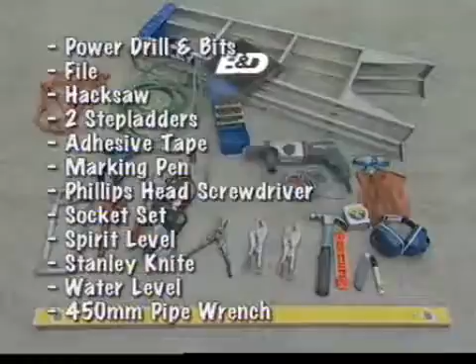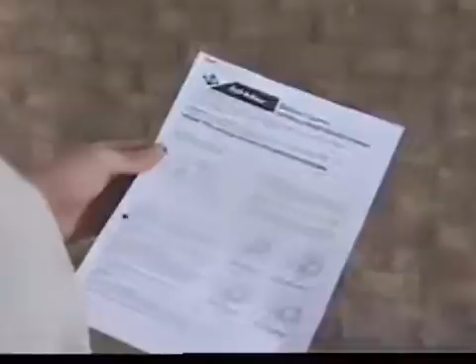B&D roller doors are designed to be mounted behind the opening. Therefore, you'll need to measure and check the opening width, opening height, side room and headroom. You'll also need to check that the opening is level and plumb and that it is structurally suitable.

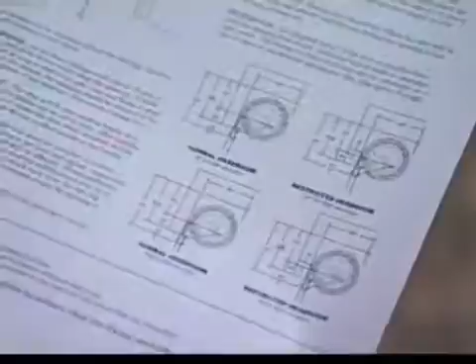The door will fit any opening height up to the marked door size. A door cannot be installed higher than its maximum size. However, it can be installed in a lower position, providing the door guides are cut to size. If the opening is too high, the door should be installed at the maximum door height position and the opening reduced.

As the door overlaps each side by 25mm or more, the door should be 50mm wider than the opening. A wider door can be fitted as long as additional side room and fixing is available. If the door is too narrow, the opening should be reduced by fitting jambs to the inside of the opening.

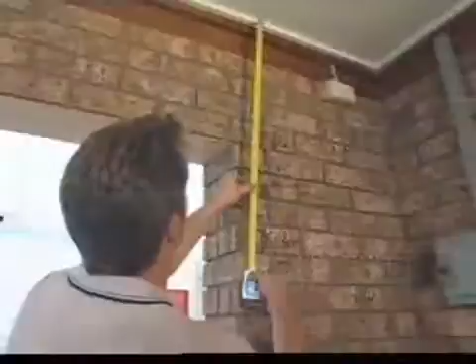The door is supported on brackets above the opening at each end and requires headroom for the door to roll up in. You should refer to your instructions for headroom requirements. Consequently, piers or doorposts must continue up past the top of the opening to provide fixing for the support brackets.

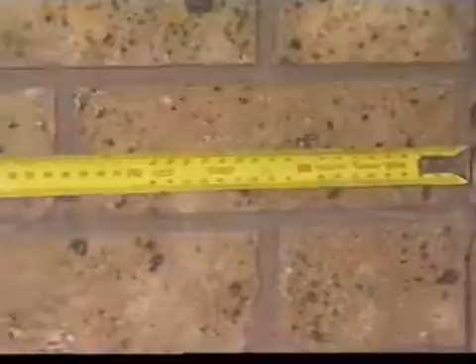A minimum of 75mm of side room is required behind the opening and should extend above the head to allow for bracket fixing. 100mm is desirable. Side room on one side of 115mm is required if a B&D Controll-A-Door garage door opener is to be fitted now or in the future.

The door must be installed in an absolutely level condition. If the opening is not level and square, appearances and/or side room requirements will be affected. Where jambs are out of plumb, extra side room or opening modifications may be required to allow the door guides to stand back from the opening edge.

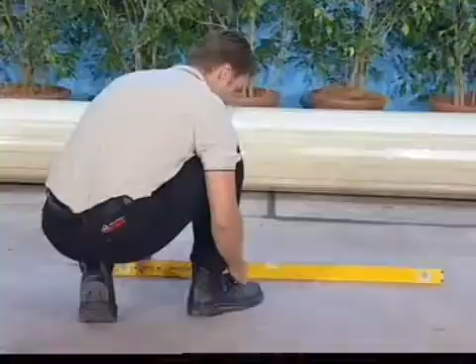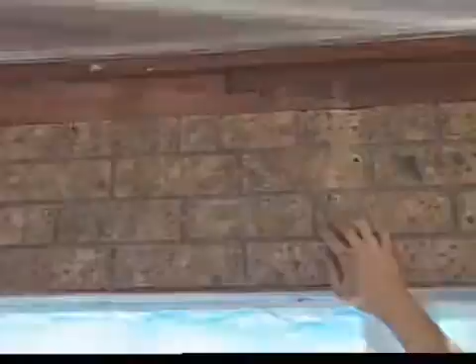The floor should be level or recessed across the opening to avoid gaps. If the floor is not level, contact B&D for taper panel options. Ensure the opening is strong enough to support the door. Ensure that the surface where the door will be fitted is flush and smooth and the area behind the opening is free from any protrusions.

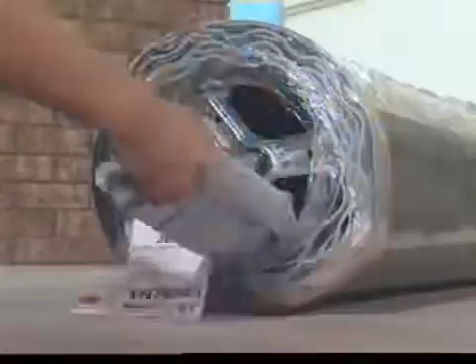Do not unwrap the door roll at this stage. Your B&D door will come delivered with identification tags and protective packaging. Remove the brackets, guides and bag of small parts from each end of the door. Make sure that you have been delivered all the correct parts.

You should have a rolled plastic-wrapped door, A-style brackets, left and right-handed, door guides, left and right-handed, steel locking bars and a small parts bag. You should check the contents of your small parts bag against the parts list in your installation manual.

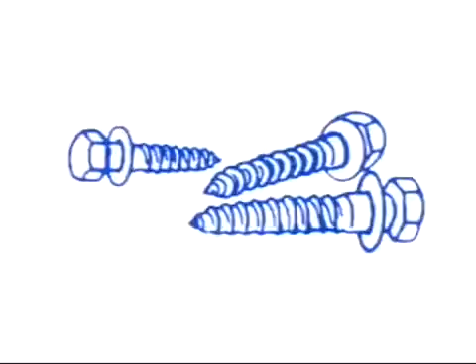The standard fixings that come supplied with B&D rolling overhead doors are coach screws for attachments to timberwork. Remember, it is the installer's responsibility to ensure that the fixing method is sound. When deciding the fixing method, dynamic loads on door brackets as well as the door weight must be considered.

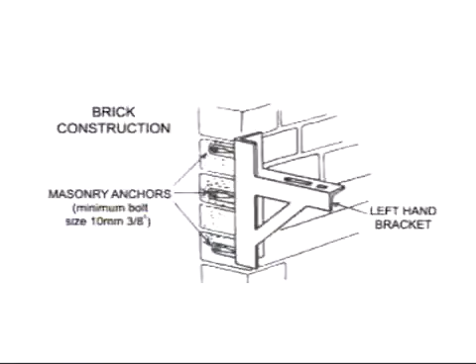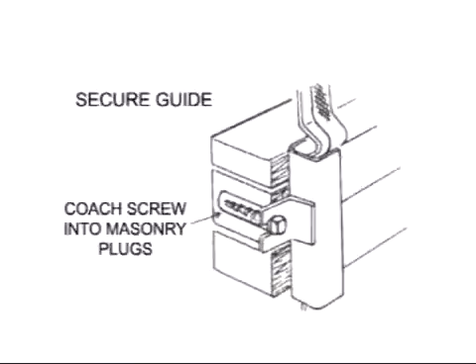For brackets, B&D recommends you use 10mm minimum bolt size masonry anchors, Dynabolts or similar. For the door guides, B&D recommend that you use the 40 by 8mm coach screws supplied with a good plastic masonry plug or suitable masonry anchors.

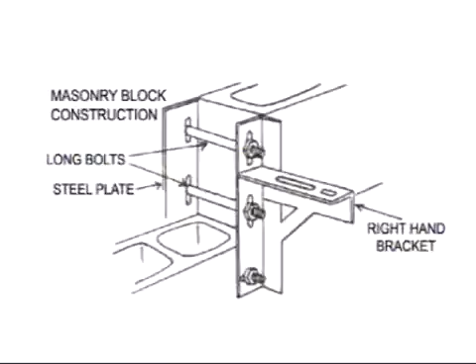Masonry blockwork should be properly filled and reinforced if brackets are to be mounted directly to blockwork with masonry anchors. Where the blockwork is not solidly filled but structurally sound, long bolts should be passed through the blockwork using suitable steel plates under bolt heads. Special consideration should be given to brick type and construction of wall to ensure satisfactory fixing. For example, welding detail if fixing to steel.

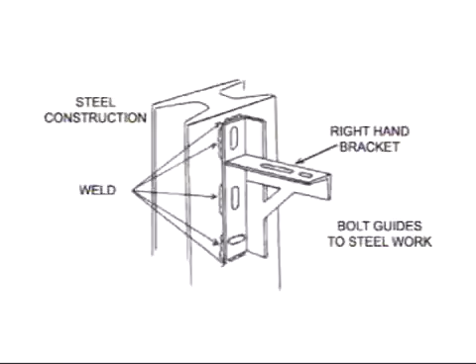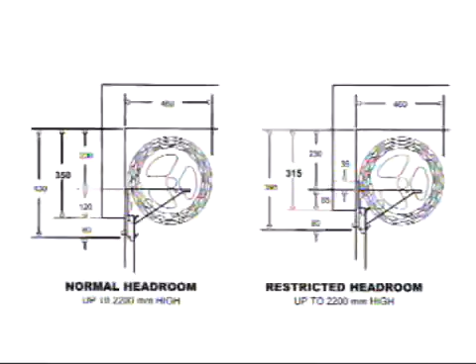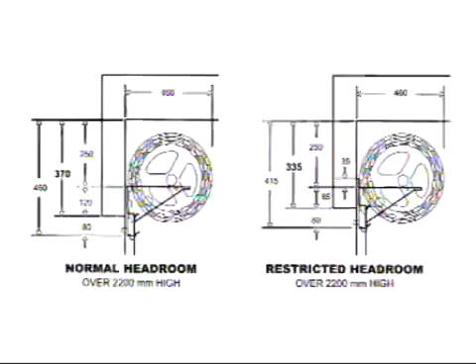To install the brackets, you must determine your headroom requirements. For doors up to 2,200 mm high, standard headroom is 350 mm, restricted headroom is 315 mm. For doors over 2,200 mm high, standard headroom is 370 mm and restricted headroom 335 mm. This installation will be for standard headroom.

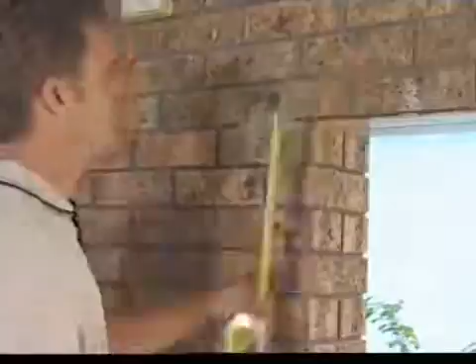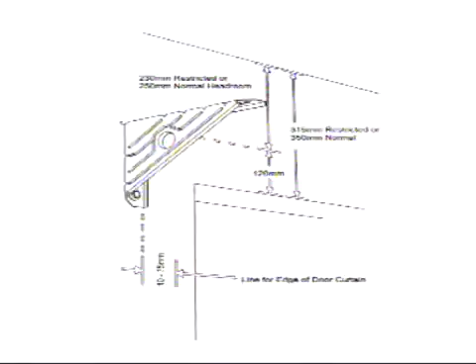Measure up 120 mm from the underside of the head. If the head is not level, measure up from the lower side first. Using a level, mark a straight horizontal line. If you have restricted headroom, measure down 230 mm from the roof or lower substructure, or 250 mm if the door is over 2,200 mm high, to the top of the bracket. The bracket should be between 85 and 100 mm up from the lintel.

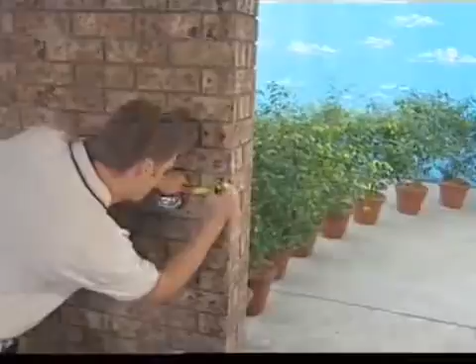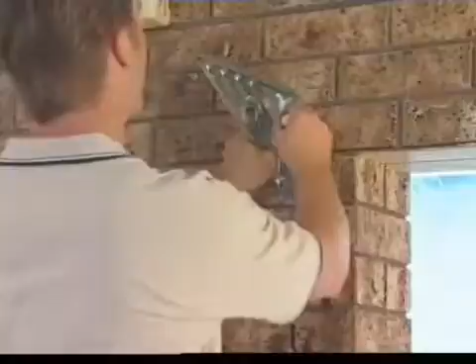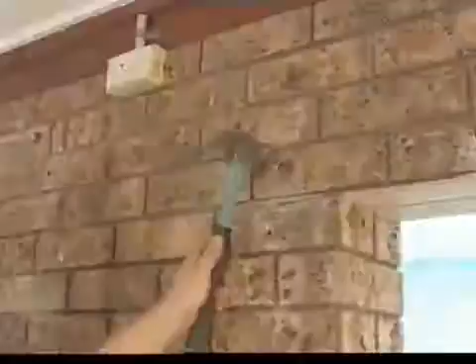Measure the door and opening widths to determine the amount of door overlap to enable correct positioning of the brackets. Add a clearance of 10 to 15 mm from the edge of the curtain to the inside edge of the brackets to determine positioning of the bracket. Mark two hole positions using top and bottom slots of the bracket. Drill both holes, ensuring that you use appropriate safety wear. Attach the bracket using the 50 by 10 mm coach screws and washers supplied, or masonry anchors if fixing to brickwork. Check that it is level.

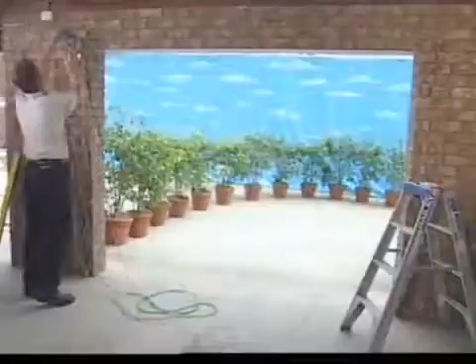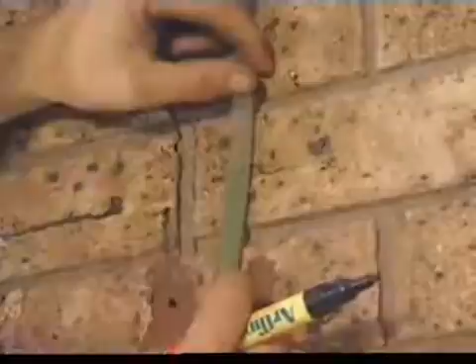Now that the first bracket is in place, the second bracket is ready to go up. Using a water level, mark the position for the second bracket. Ensure that the brackets are perfectly level for the door to operate correctly. Recheck levels and then drill and fix as you did with the first bracket.

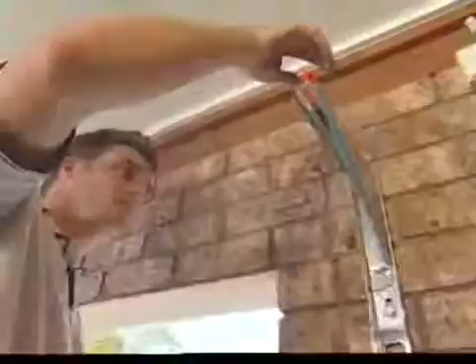If the headroom is less than 250 mm, a false head should be fitted to improve the external appearance of the garage opening. Note that the false head must not be installed too close to the curtain face. B&D head infill panels are available to match or contrast with your doors.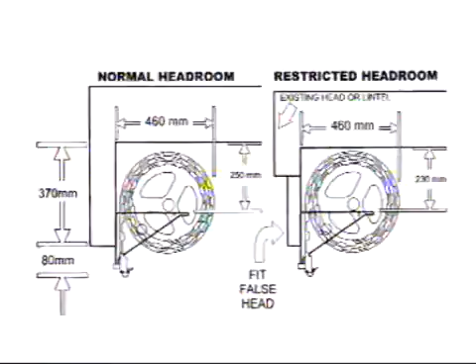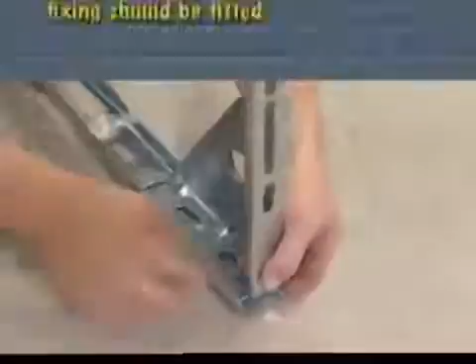An A2 extended leg bracket should be used in conjunction with the standard A-style bracket under the following circumstances. If the brickwork is old or in any way suspect, where old brickwork with lime mortar is encountered, or any doubt exists as to the holding power of the masonry work, a timber frame, which continues above the head for bracket fixing, should be fitted on the back surface of the opening. If floater bricks are present, but sound fixing lower down the brickwork is available. When fixing to honeycomb or semi-hollow bricks. When an RSJ interferes with the bracket.

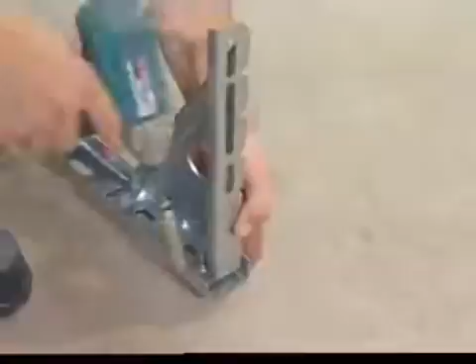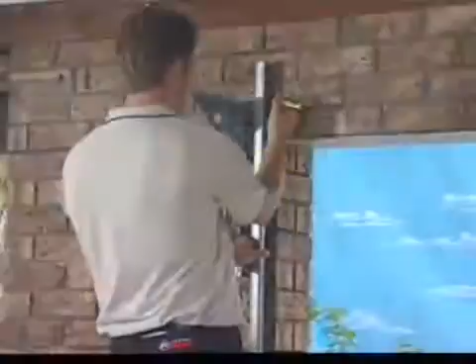When fixing brackets to timber, the heavier coach screws supplied are usually adequate; in some cases, especially where timber is very soft, old or insecure, coach bolts should be used. Check that the guides are the correct length. They must be level with the brackets or, in the restricted headroom position, 35 mm max above the brackets. If the guides are too long, they will need to be cut to the correct length. An angle grinder can be used to do this.